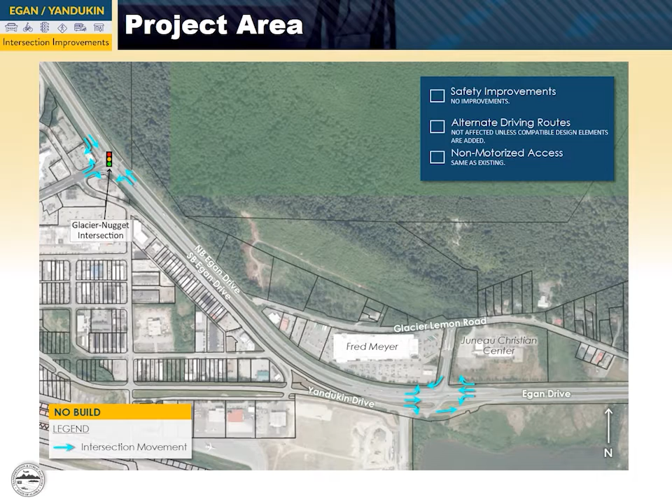The Egan-Yandukin project process includes data collection, engaging the community, and generating and screening a wide range of potential intersection improvement options. 2020 work to date has developed draft alternatives, draft evaluation criteria, and early draft evaluation results. Next, the project team will use public feedback on these to refine the design of the alternatives and finish analyzing their impacts. In early 2021, DOT and PF will present recommended alternatives for the intersection.

By spring 2021, all of the analysis will be documented and available for public comment. The design and construction of any resulting project would need to be funded through the statewide Transportation Improvement Plan.

In response to the immediate need to improve driving safety at the intersection, the project team has received funding to advance a separate safety project that focuses only on improving driving safety at the Egan-Yandukin intersection. This project will be designed in 2021 and potentially constructed in 2022. Later in this presentation, we will review this safety project and show how it could be modified to meet additional needs for the Egan-Yandukin Intersection Improvements Project.

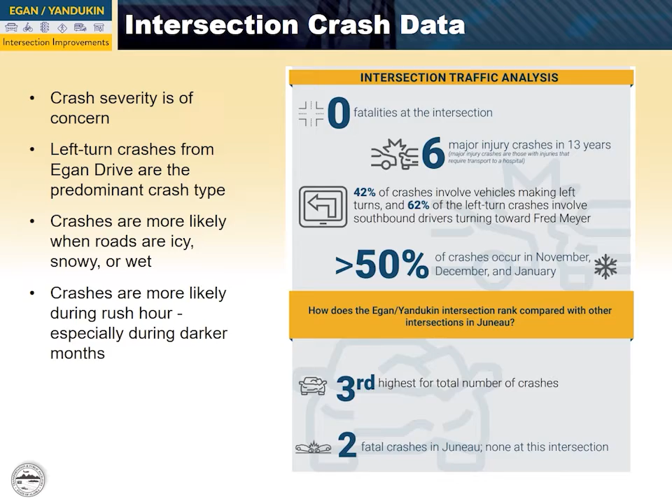Public comments made it clear that the project's primary purpose and need is to improve intersection safety for all users at the intersection. Secondary project needs are to provide alternate driving routes when Egan Drive is blocked, improve non-motorized access for people walking, cycling, or using any other active transportation mode, and maintain traffic capacity and flow.

Additional project goals were also identified: to be consistent with approved land use plans and ordinances, maintain or improve access to and visibility of businesses in the area, and to support opportunities for economic development and future land uses.

There are a lot of good ideas on how to improve the intersection. Getting to a few of the best ideas will take several steps. The process DOT and PF is using first identifies the purpose and need for the project. The next step is to develop a range of alternatives that meet that project purpose and need. The final step is to evaluate the alternatives.

2 screening levels will be used during that evaluation to explore the benefits and impacts of each alternative. The top 5 draft alternatives that come out from the first level of screening will be evaluated during a second level of screening, designed to more finely screen the range of alternatives. The alternative or set of alternatives that rank highest from both rounds of screening will be recommended for further action.

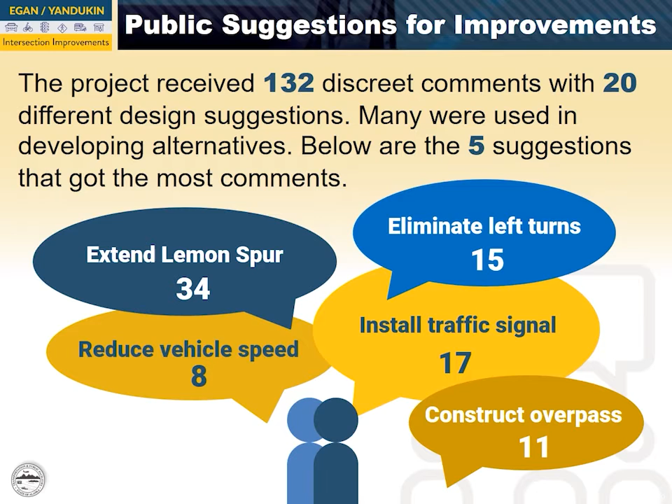Each of the 15 draft alternatives will get reviewed using draft level 1 screening criteria. These draft criteria will score the alternatives based on how well they meet the project purpose and need, as well as other considerations. Safety metrics are proposed to get greater weight in the evaluation of draft alternatives. These safety metrics are crash frequency, crash severity, and safety for bicyclists and pedestrians.

The crash delay secondary metric would show how well each of the draft alternatives provides an alternative driving route when Egan Drive is blocked in the case of crashes. The accessibility comfort secondary metric would measure how easily non-motorized users can cross Egan Drive.

Other metrics will evaluate how well the draft alternatives would address social and economic considerations and other project goals. These other metrics include consistency with land use plans, impacts to business visibility and access, wetlands impacts, impacts to protected lands and private property, traffic delay, and cost range. Since these are in draft form, your comments on the criteria are valuable.

All 15 alternatives were evaluated and scored using the draft level 1 screening criteria. Based on results of that, 5 of the draft alternatives are suggested to get more in-depth review. The remaining 10 other alternatives are recommended to not progress into further analysis because they did not meet the project screening criteria as well as the top 5 did.

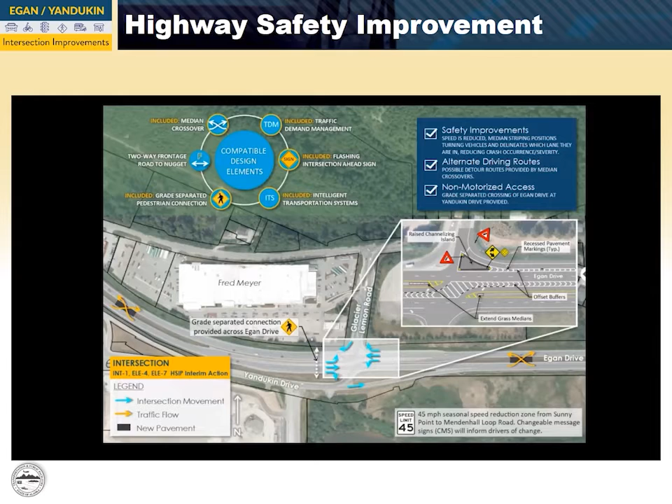Now let's look at the preliminary screening results. As you can see, all of the baseline purpose and needs have been met with this alternative. Therefore, everything at the top is green. Now let's look at the other considerations. One thing that's important to note with this alternative is that none of these show red, which means that they're all the same as or improved from the existing condition. This alternative meets the needs as much as possible without negatively affecting the environment, with minimal need for right-of-way and at medium cost.

According to the evaluation with these draft Level 1 screening criteria, the project team proposes moving this alternative forward along with other alternatives for the Level 2 screening. Components of this alternative that will receive further review include the HSIP-funded safety project, as well as the elements to improve pedestrian access and to develop alternate routes in case of a crash.

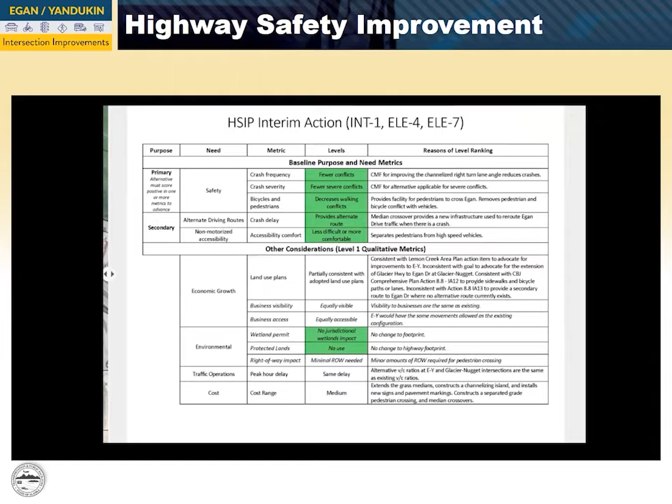This alternative is the partial access signalized intersection, which we have labeled INT2. This alternative builds a signal at the Yandukin Glacier Lemon Road intersection without any other changes. You still cannot cross Egan from one side to the other, and you still can't turn left from Yandukin or Glacier Lemon. By installing signal control, we reduce left turn crashes, which is the common crash type that causes delay and injury at this intersection.

We are also including median crossovers to allow traffic to keep moving when a crash closes lanes, and pedestrians will cross at the signal, just like at the Glacier Nugget intersection. So we have met all of the needs that we have identified for this project. There are safety improvements, alternative driving routes, and non-motorized access.

Now I will describe the median crossover treatment. The median crossover builds pavement in the median that can be used to keep traffic moving when lanes are closed because of a crash.

So, for example, if a crash closes the highway at the Yandukin Glacier Lemon Road intersection so that no one can go outbound towards Mendenhall Valley, traffic cones are placed, allowing vehicles coming from downtown to cross the median and use one lane to travel outbound, while vehicles heading downtown use the other lane to travel inbound.

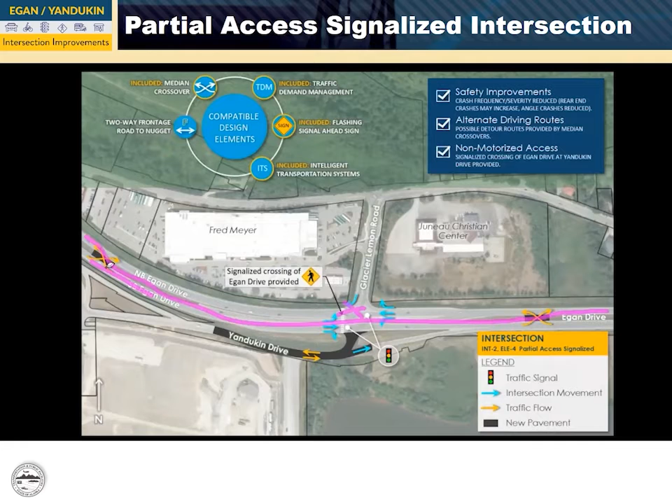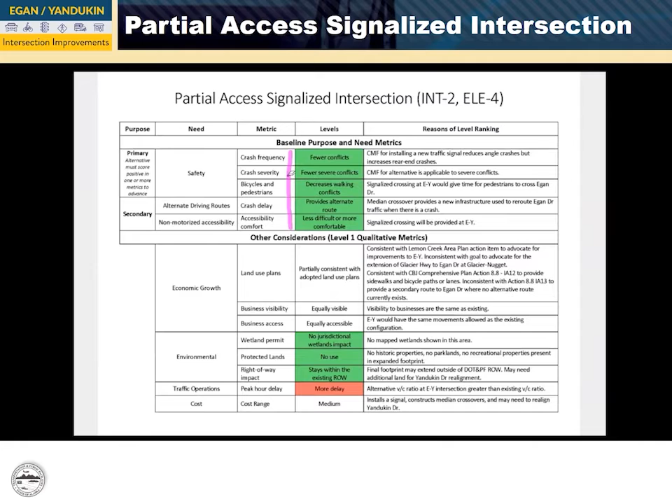As I described before, this alternative meets all of the identified needs for this project. So all of the needs under baseline purpose and need metrics at the top are green. Now let's look at the other considerations. Looking at the right-of-way cell, which is green, this alternative can be built without needing any additional right-of-way.

And then right underneath it, peak hour delay. Adding a signal means that some traffic that is not currently stopping will stop at this intersection. So more delay means the delay is red. Using the draft screening measures, this alternative is proposed for further review.

This alternative is the full access signalized intersection, which we've labeled INT3 ELE4. This alternative builds a signal at the Yandukin Glacier Lemon Road intersection and allows all movements at the intersection. So you can cross from Yandukin to Glacier Lemon, and you can turn left from Yandukin or Glacier onto Egan.

This alternative meets all of the baseline purpose and need elements: safety improvements, alternative driving routes when there is a crash, and non-motorized access. By adding the signal control, we reduce left turn crashes, which is the common crash type that causes delay and injury at this intersection. We've added median crossovers to allow traffic to keep moving when a crash closes lanes, and pedestrians will cross at the signal, just like at the Glacier Nugget intersection.

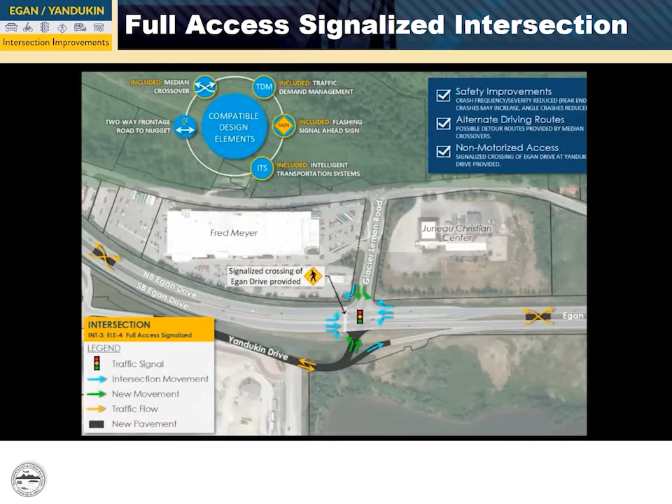As you can see, this alternative meets all of the baseline purpose and need metrics. So all of the cells at the top are green. Looking at business access, this alternative will provide more access to businesses because of new movements allowed at the intersection. So it is green.

Looking at right-of-way impact, this alternative needs minimal right-of-way so that the approaches can be lined up for left turns and for through movements on the Yandukin side. So this is white. Looking at peak hour delay, adding a signal means that some traffic that is not currently stopping will have to stop. So delay is red. Using these draft screening measures, this alternative is proposed for further review.

This alternative is the two signalized T intersections, which we have labeled INT6. This meets all of the purpose and need elements. It has safety improvements, alternate driving routes when there's a crash, and non-motorized access. Now I'll explain how this alternative works. This alternative separates Yandukin Drive and the Glacier Lemon Road intersections and signalizes both of these intersections. The signal control reduces left turn crashes, which is the common crash type that causes delay and injury at this intersection.

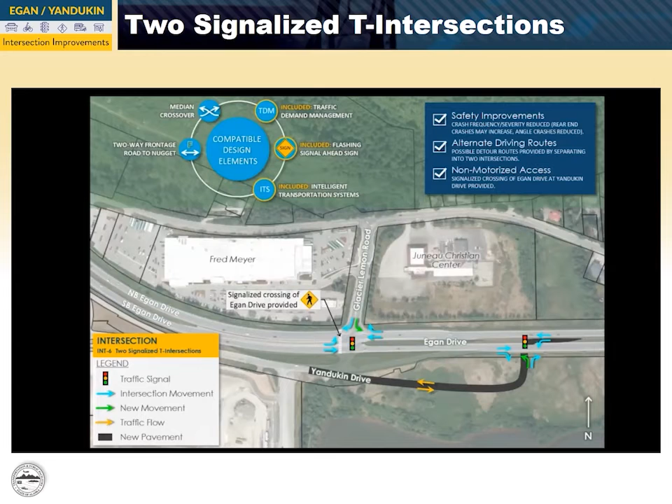As you can see, this alternative meets all of the identified baseline purpose and need metrics. So everything at the top is green. Looking at the other considerations, let's look at business access. This alternative provides more access to businesses because of new movements that are allowed at the intersection. So this is green.

Looking at right-of-way, this alternative needs substantial right-of-way because moving Yandukin away from the curve towards downtown will require right-of-way. Therefore, this is red. Looking at peak hour delay, having a signal means that some traffic that is not currently stopping will have to stop. So delay is red. Based on these preliminary screening measures, this alternative is proposed for further review.

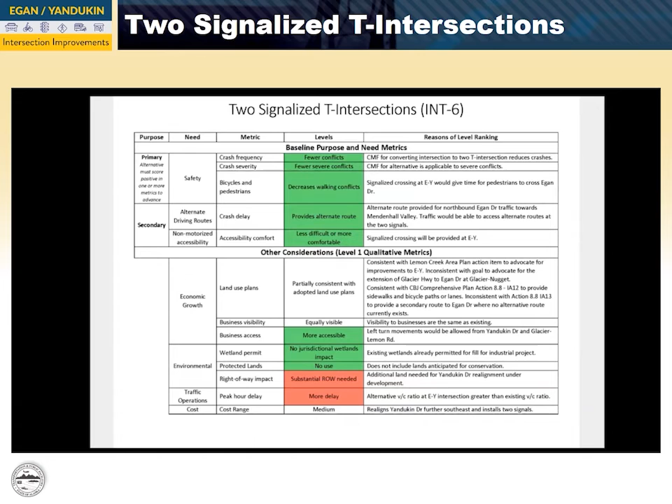This alternative is the Diamond Interchange or overpass at the Egan-Yandukin intersection, OVP2 ELE 5. This alternative meets all of the baseline purpose and need metrics. There are safety improvements, there are alternate driving routes when there's a crash, and there is improved non-motorized access.

Now I will explain what the alternative does. This alternative will build an interchange or overpass at the Yandukin Glacier Lemon intersection, similar to the interchange at Sunny Point. This will allow all movements at the Yandukin Glacier Lemon intersection. This alternative also extends Glacier Lemon Spur to the Glacier Nugget intersection.

Crashes will be reduced with this alternative because the Egan Drive traffic will be carried over the turning traffic on a bridge. This alternative builds a new route connection, which will allow traffic to keep moving when a crash closes Egan Drive. And pedestrians and bikes will be able to cross under Egan, improving non-motorized access.

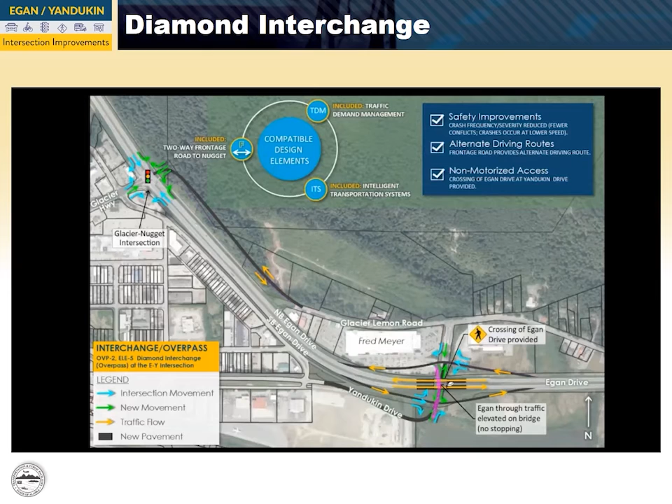Now let's look at the preliminary screening results. This alternative meets all of the baseline purpose and need metrics. So everything at the top is green. Now let's look at the other consideration metrics. Under land use plans, this alternative is consistent with land use plans, which advocate for the extension of Glacier Lemon Spur to the Glacier Nugget signal, so this is green.

Under business visibility, barriers associated with the overpass will reduce the visibility of business signs, so this is red. Under business access, this alternative provides more access to businesses because of new movements allowed at the intersection and the extension of the road to Glacier Nugget, so it is green. Under wetland permit, this alternative likely impacts small sections of wetlands because of the extension of Glacier Lemon Spur to Nugget, so this is red.

Under protected lands, all alternatives do not appear to affect parkland, historic properties, or recreation resources, so all alternatives mark this green. Under right-of-way impacts, substantial right-of-way is needed both because of the size of the interchange and because of the extension of Glacier Lemon, so this is red.